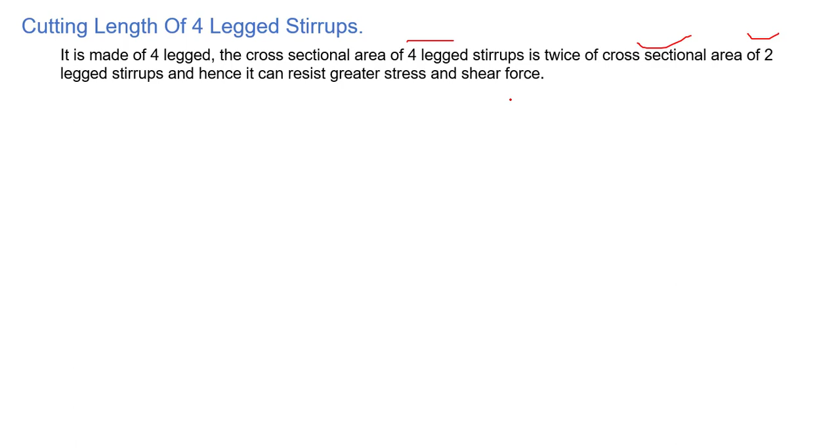Here we have examples of 4-legged and 6-legged stirrups. In this column, or it could be a beam as well, we have a 4-legged stirrup. A 4-legged stirrup is nothing but two stirrups: one external stirrup, and one internal stirrup. So the legs are 1, 2, 3 and 4.

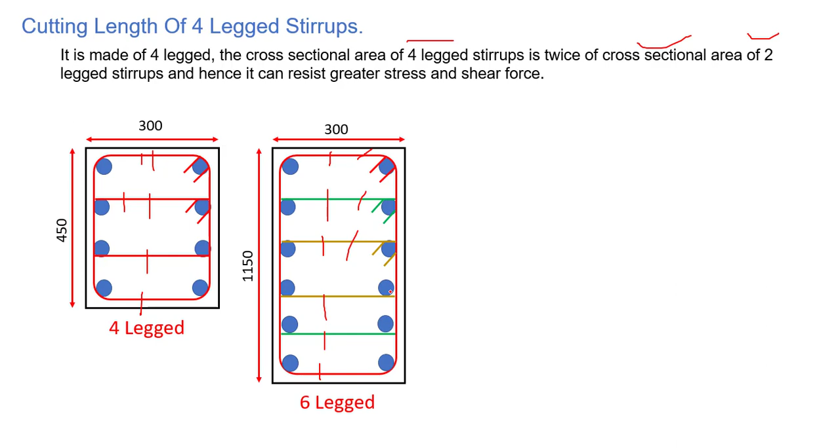Now, a 6-leg stirrup could be 8 as well. This is just an example: 4 leg, 6 leg, 8 leg, 12 leg, according to the column or beam size. For the 6-leg, legs 1, 2, 3, 4, 5, 6 - it is nothing but 3 stirrups: the external, then the next internal, then the next internal. So this is basically the 6 leg.

Now let's see the example of the 4 leg. Let's suppose this is our column, and this is the external stirrup going in this direction, then in this direction. Now with this we have another stirrup that is holding the inside reinforcement, going in this direction, then coming over here.

So one is external, and on top of this external stirrup we have another stirrup that is inside this, just supporting the inside reinforcement. But between these 2 stirrups we do not have any kind of spacing - both of these are connected. So this is external, this is internal, and both of these together make what? 4 legs: 1, 2, 3 and 4. This is how on site we can place the 4-leg stirrup.

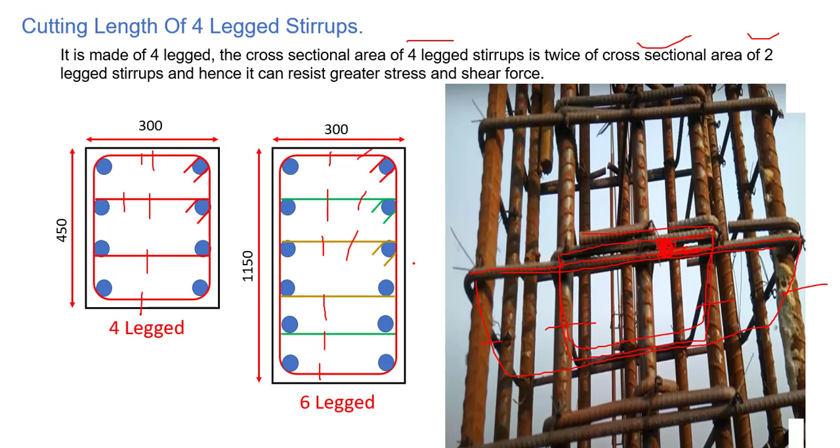Hope you really understand the concept. 4 leg is nothing but we have two stirrups, and 6 leg is nothing but we have 3 stirrups. 8 leg is nothing but we have 4 stirrups. So let's see how we can find out the cut length of this 4-leg stirrup.

As I already mentioned, this is nothing but 2 stirrups, and for the external one it is not very difficult to find the cut length, because we have already found it out in the rectangular stirrup. This is the main stirrup for which we need to find the cut length.

The given data here is: we have the column as 450 mm by 300 mm, this side and this side. The dia of the dowel bar - these longitudinal bars - is 12 mm, and the dia of the stirrup, whether it is this one or this one, is 6 mm. The concrete cover is 40 mm, and the bend is 14db.

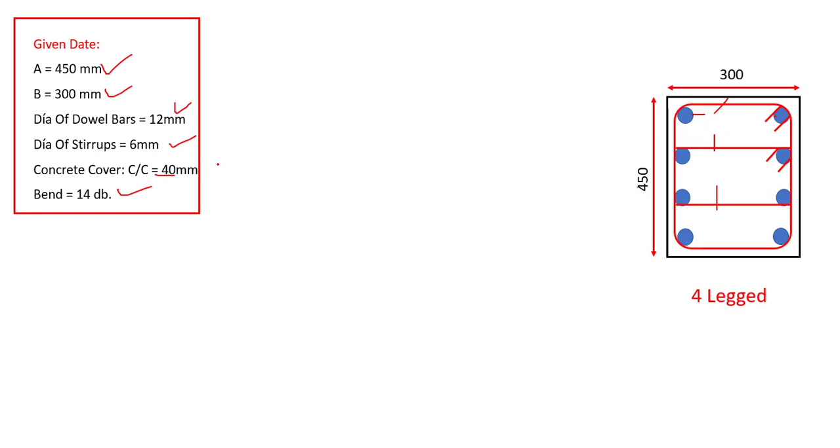Let's see how we can find out the cut length. We will find only the cut length of this one, this stirrup - then it is easy for us to find the other one as well. This is the main one. In order to find the cut length of this stirrup, what we need to do is first find the center to center distance.

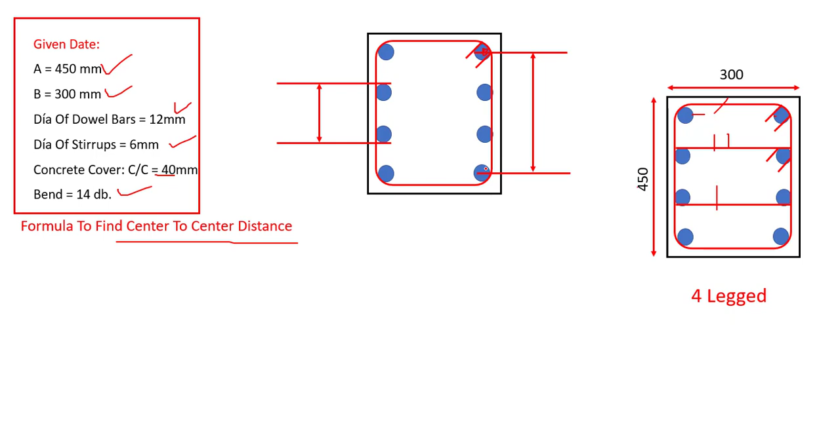Center to center distance between the first and the last dowel bar - this center to center distance, let's call it A. It is 450 minus we need to deduct the concrete cover at this end and concrete cover at this end, minus we need to deduct the dia of this external stirrup as well.

We have 2 sides, so 2 into dia of external stirrup, minus we need to deduct half the dia of this main bar or longitudinal bar at one end, and half dia at this end as well - that will make the full dia. This gives us the value of center to center distance from this position up till here. So when we put the values in: 450, minus 40 minus 40.

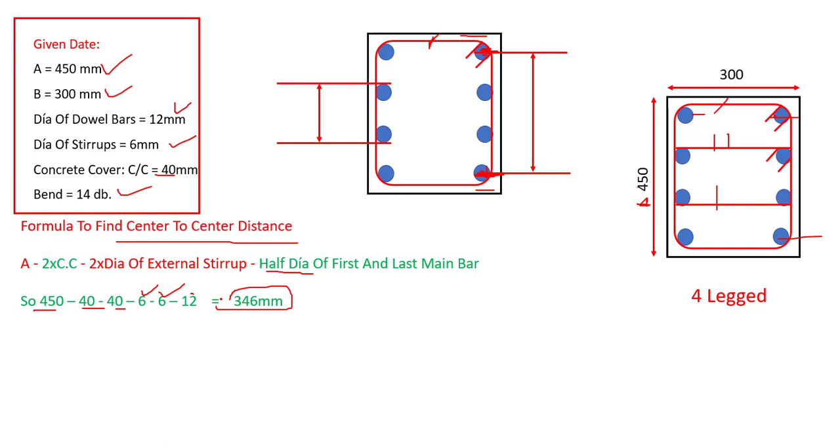Okay, so 450, this one, A, minus 2 into concrete cover, so 40 minus 40, minus 2 into dia of external stirrup, so 6 minus 6. Minus we need to deduct half dia at this end and half dia at this end. Half plus half will make full as 12 mm. So this is total of 346 mm center to center distance. So this is how we can find out center to center distance. Whether it is 4 legs, 6 legs or 8 legs, process will be same.

Now C/C distance between each bar. Next, we need to find out center to center distance between each bar, right from this position up till here. So in order to find out this one, what we need to do is divide this center to center distance by the spacing. Right now we have 4 legs, so how many spacing do we have? 1, 2 and 3. So this is how you can find out the spacing. It is 4 leg; in 6 leg, the same way you can find out the spacing. So 346 divided by spacing, we have 3, so it is 115.33. So this is basically center to center distance between each bar.

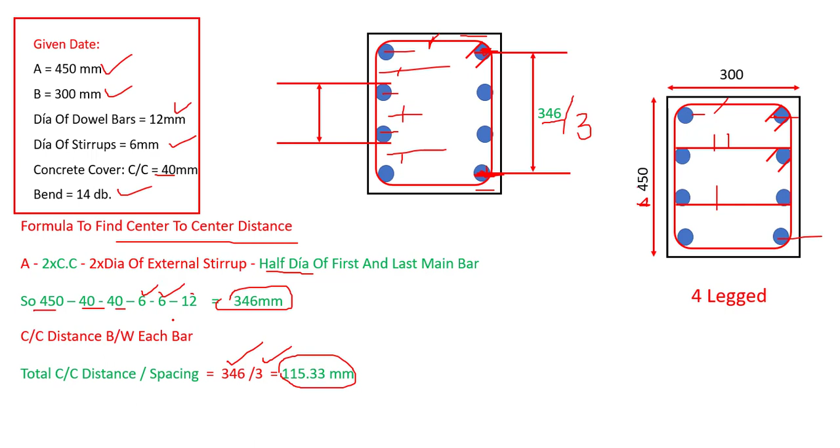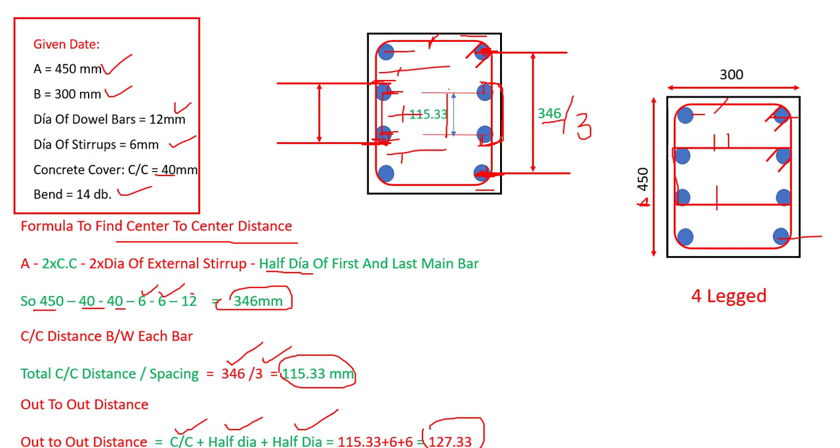Now, in order to find out this cut length, we need to find out the out to out distance as well. This is center to center, right from this position up till here, but we need to reach up till this position, and here up till this position. So in order to find out this one, we use this formula: center to center distance plus half dia at one end and half dia at another end. So it will give us the total value as 127.33. So this out to out length for this stirrup is 127.33, and this is what we need over here.

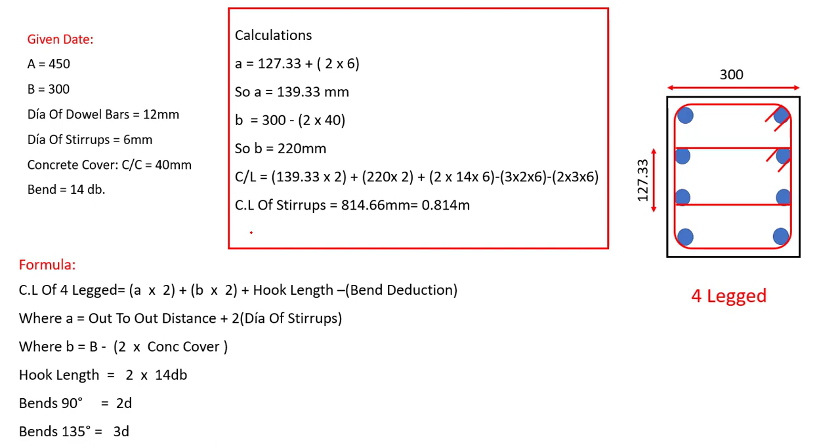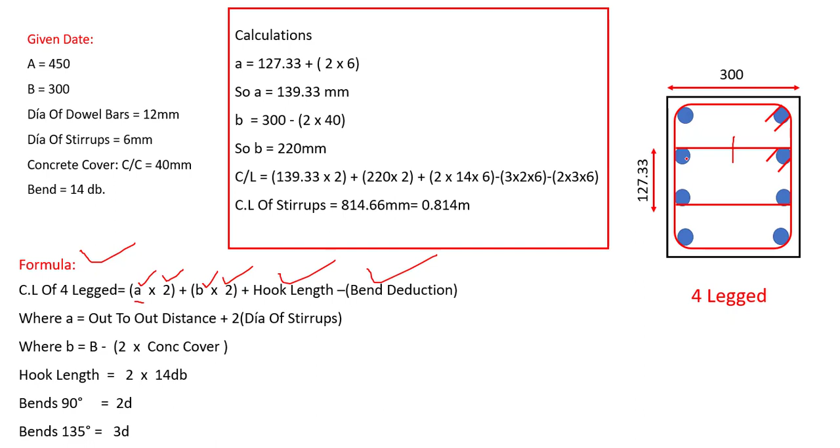Now let's put the formula. Let's put the values in the formula and find out the total length over here. Now formula to find out the cut length for the 4 legged, basically we are finding for this one. This is easy, as we did in the rectangular stirrup: it is A into 2 plus B into 2 plus hook length minus bend deductions. And what is A? A is basically out to out distance. We are taking A as this value right now, for 4 legs case, this value. Out to out distance plus 2 into dia of stirrup in order to find out the full length.

Right from this position, let's suppose we have out to out distance from these two dowel bars, plus we need to take out to out distance from the stirrups as well, so 2 into dia of stirrup. And B is equal to B minus 2 into concrete cover from both ends. So hook length we have 2 into 14dB, and bends we have 2D and 3D as well, for 90 degree and 135 degree. So we have 3 and 2 over here. Let's put the values over here.

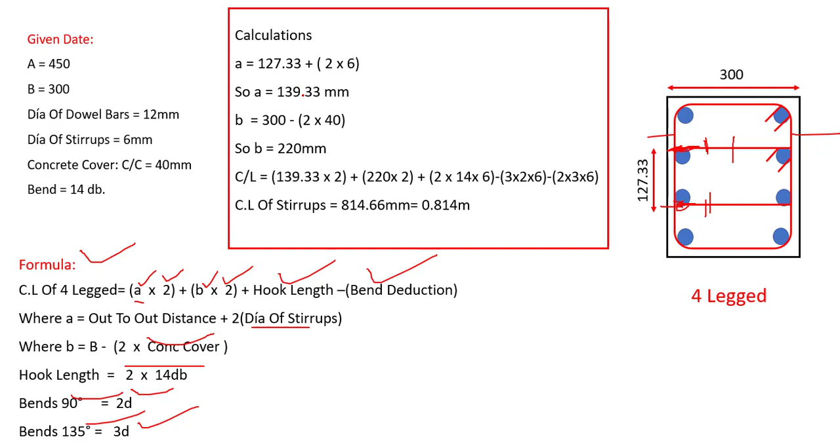A is equal to out to out distance we found over here, 127.33, plus 2 into dia of this stirrup, this one and this one as well, in order to find out this total. So A is equal to 139.33. Now B is equal to 300, minus 2 into concrete cover from both ends, so B is equal to 220 mm. So let's put it in the formula.

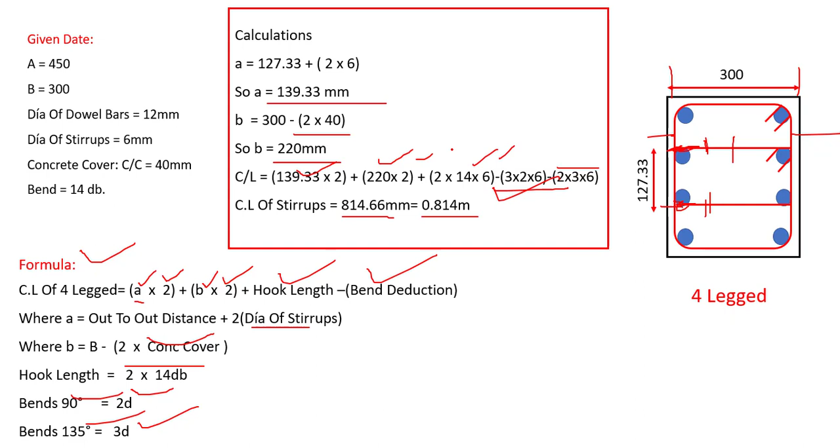So cut length of 4 legged is A into 2, B into 2, plus hook length minus the bend deductions for 90 degree and 135 degrees. So cut length is 814.66, meaning 0.814 meter. So this is how we can find out cut length of 4 leg stirrup, and hope you understand what is 4 leg, what is 6 leg, what is 8 leg. According to this process you can find out for 4 leg, 6 leg, 8 leg, 12 leg, it could be any. Main thing is to find out the distance between two bars, and if you can find out this distance, you can find out any of the leg.